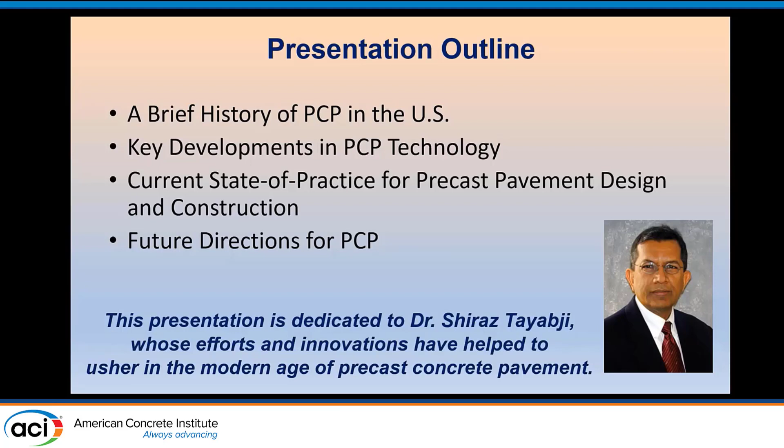Starting out at the ground floor, for those that may not be familiar with the technology, the real motivation for precast pavement technology is the fact that we have a lot of very busy, very congested facilities. On the highway side, very high levels of traffic day and night make it very difficult to find times to work on these pavements. There need to be alternatives for repairing and addressing distresses in these pavements that don't take much time but are still durable. And the same thing is true on airfield pavements as well.

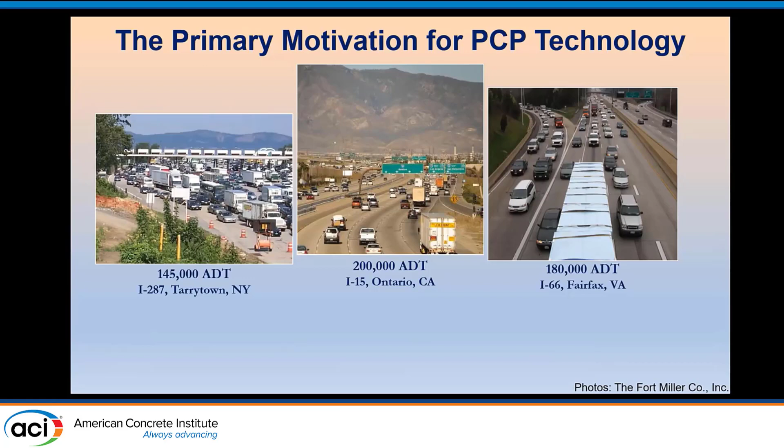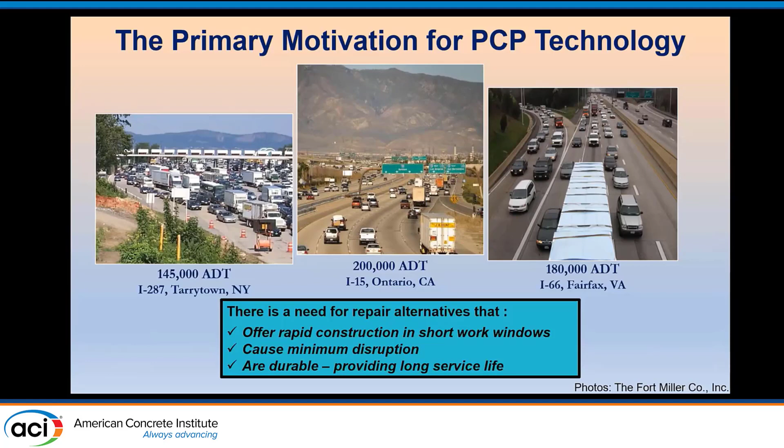I didn't show a crowded airfield runway or taxiway here, but clearly those are also facilities we can't really afford to shut down for very long because they are mission critical. So there's usually a need for repair alternatives that allow you to make the repair in a very short work window with minimal disruption to traffic, and yet are durable, providing long potential for service life, 40 years or more. There are different technologies available, but precast concrete pavements are one of them, and one that's been developed relatively recently.

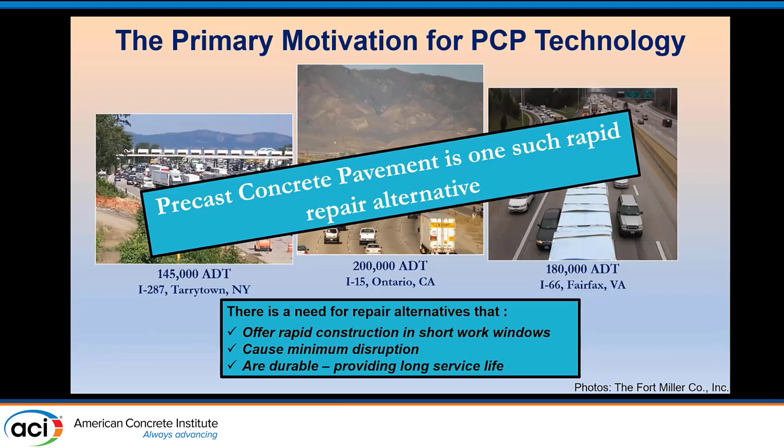If we look at a brief history of precast pavements in the United States, it actually goes back about 50 years. There was some experimental use of joint repairs, both partial depth repairs and full depth repairs of panels in Michigan and Virginia. There's actually a fair amount of work done at airfields, military bases primarily, demonstration projects and trial projects in the 70s and 80s, and you see some of those listed here.

But it didn't really take off, so to speak. The technology really was not adopted. We didn't see hardly any of it into the 80s and 90s.

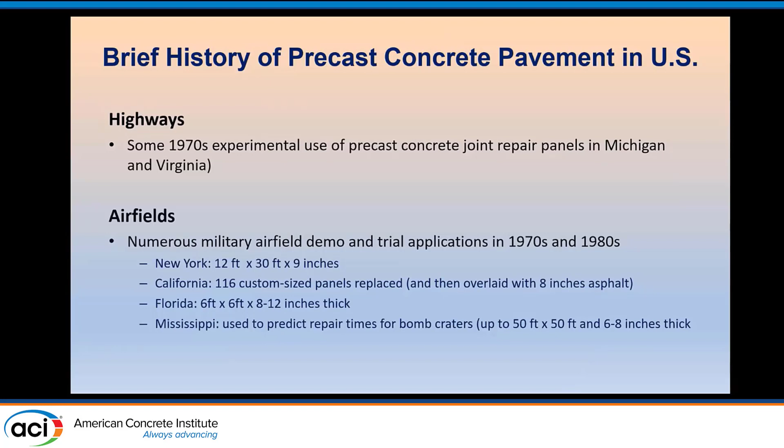But in the early 2000s, there were 4 projects that I would consider kind of kicked things off, and they all kind of happened at about the same time. One of them was the I-35 Frontage Road project down in Georgetown, Texas, a demonstration project put together by Frank McCullough at the University of Texas, a professor there, and a number of his grad students. It was a demonstration reconstruction project that took place over a couple of years.

It covered 2,300 centerline feet of 8-inch roadway, 2 lanes wide with shoulders, so a total of about 36 feet wide. Post-tensioned in 2 directions, in both directions, which resulted in some fairly long effective panel lengths. The actual panel sizes, as you can see in the photographs, were probably around 8 to 10 feet longitudinally, and either half the width, about 18 feet wide or 36 feet wide. They did some full width placements and some half width placements.

You can see some of the photos here, and it was a real important project. It was the first major precast post-tension project, demonstrated a lot of specific construction techniques, the use of the tongue and groove system to help align things, the use of plastic sheeting to reduce friction, to allow you to post-tension effectively and draw the slabs tight together, and demonstrated the performance effectiveness of the technique over time. So it was a good project, and it helped spur things on further.

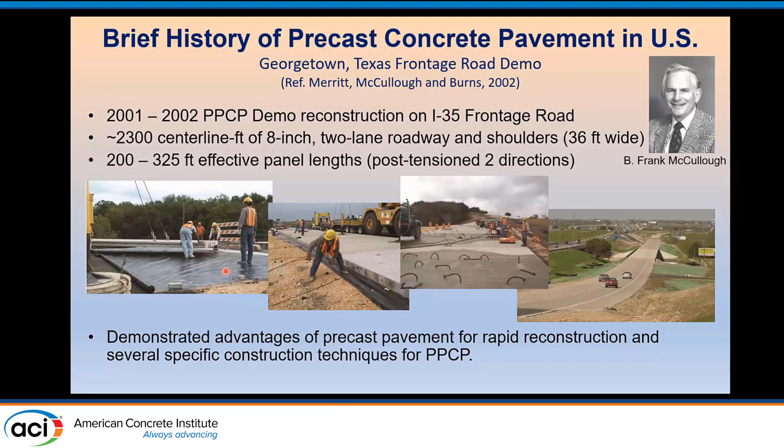Another project happened around almost exactly the same time, referred to in Shiraz's presentation this morning, the Tappan Zee Bridge Toll Plaza, just north of the New York City metro area. This was the first major construction project done under live traffic, about twice the square footage of the Georgetown project, but over 1,000 jointed concrete panels, doweled and tied together, placed about 8 to 10 per night, overnight, when traffic was greatly reduced.

And they were all placed very precisely using a system developed by Mr. Peter Smith at the Fort Miller Company, who was assisted by Ernie Barenberg, Professor Barenberg from the University of Illinois, on some of the conceptual development at the time. You can see they used a bottom slot system for the dowel bars, which gave a fairly clean surface.

It had grout distribution channels for injecting grout under the panels and spreading it to provide uniform support. But the main part of the support was actually provided by this very finely graded bedding material, placed on a pretty accurately constructed base material as well. This allowed the slabs to be placed and pretty uniformly supported even before the grout was injected under the pavement.

And this allowed you to really expand the work windows. For example, if you have an 8-hour work window and you've got to, within that time, do your saw cutting, demolition, removal, placement of the panels, and then place grout and allow it to cure and gain strength, you've effectively shortened your work window.

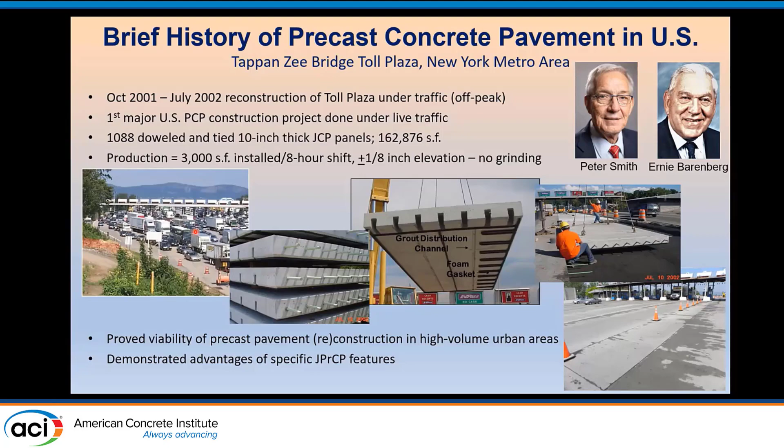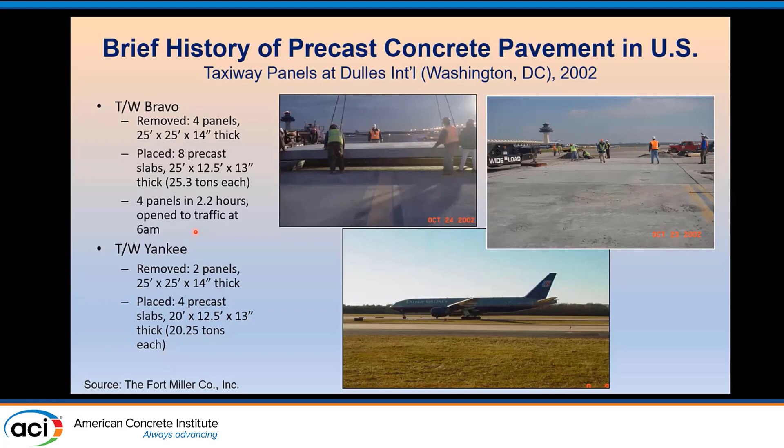There were also at the same time a couple of projects done at airfields. One was done again with the Fort Miller system at Dulles International Airport in 2002. A handful of panels on two different taxiways were removed and replaced, open to traffic after just a few hours of construction time. And then there was another one in New York at LaGuardia Airport, very similar.

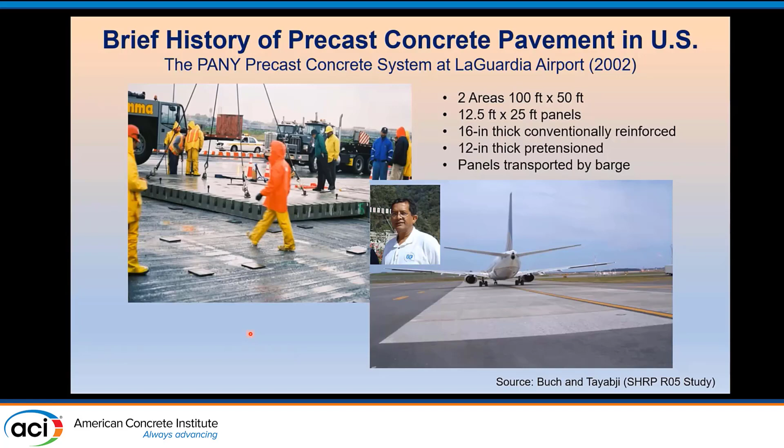But again, these were the only two major projects for precast on airfield pavements in the United States for quite a long time. Those four projects together, the two airport projects and the two pavement projects, did spur a lot of interest. People saw the potential. We certainly had the need with our urban areas and high traffic areas to expand the use of this technology. And that led to the formation of a technology implementation group, the AASHTO TIG, or LST, the lead states team on precast concrete paving slabs.

This group, building on the enthusiasm from those first four projects, was active for about 3 or 4 years, starting in 2005. Representatives from a number of state highway agencies and some toll authorities, New York State Thruway Authority and Port Authority of New York and New Jersey, as well as folks from Federal Highway Administration, academe. Dr. Berenberg was on the panel, and Dr. Buch, I believe, was on the panel from Michigan State University, and some folks from industry.

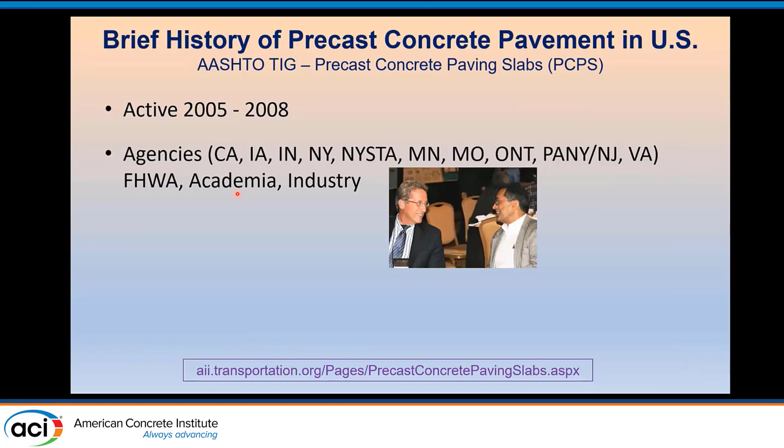All the major purveyors of precast pavement, if you like alliteration, were on the panel as well, and that included the guys on this call here today. Myself and Shiraz were both a part of that group as well.

And the products that this group produced were very useful in spurring the additional implementation of precast pavements around the country. Probably most useful were, almost in reverse order from how I've got them listed here.

Specification Clearinghouse: all the specifications from the agencies that had done work were placed online in a place where they were readily accessible for people thinking about doing precast paving, to reference those specifications and build off of them. The panel also developed their own set of guide specs based on what we thought were the best practices from the existing state specifications.

There were 3 separate specifications: one for the design of the systems, one for constructing and fabricating the systems, and one for approving systems. There was also a frequently asked question list for people just getting started in the area. All this stuff is still available online. It's been a number of years, but I provided the link at the bottom of the page here where you can still find all of this information and material.

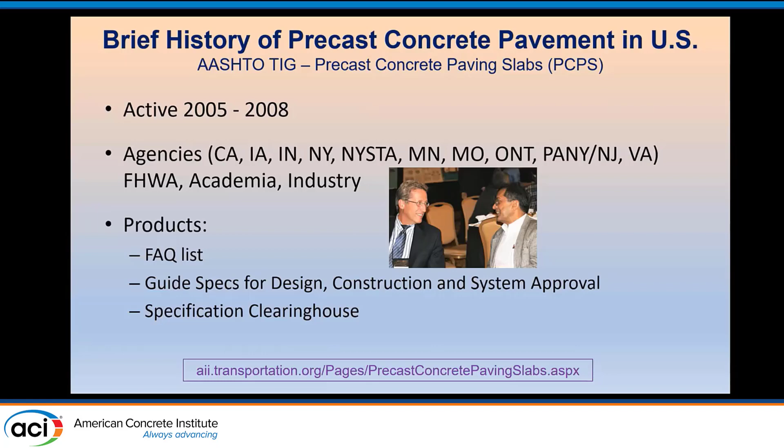An update in 2018 was published by the National Precast Concrete Association. As of 2018, there were more than 113.5 lane miles, and that's just the jointed type of precast pavement, not counting pre-stressed post-tensioned. So from 2013 to 2018, this continued on a very steep trend, about 4 times as much precast built, a 4-fold increase over 5 years. A pretty phenomenal rate of adoption.

Again, Shiraz was instrumental in that adoption. He was working with the Federal Highway Administration throughout this time to help states with their implementation through FHWA's programs.

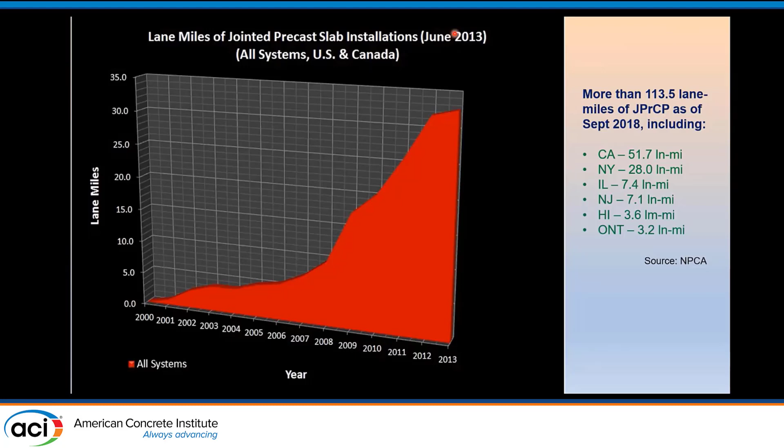There's not a lot of time here to talk about precast in general. I'm going to talk about what I think were some of the key developments along the way that helped spur the adoption of precast pavement technology. In my mind, probably 3 of the most important things were the advances in slab support and slab leveling, advances in achieving desired surface geometry, and in load transfer system design.

There's another bunch of things that would get honorable mention on this list, but today they're kind of unmentionable. I would talk about pre-stressing for using longer panels or reduced slab thicknesses, and some of the things that Shiraz talked about earlier for repairs of CRCP pavement that he worked on with the Illinois Tollway Authority. Peter Smith has a different design he had worked on developing as well, I think was being implemented in Texas. But we won't talk about those any further.

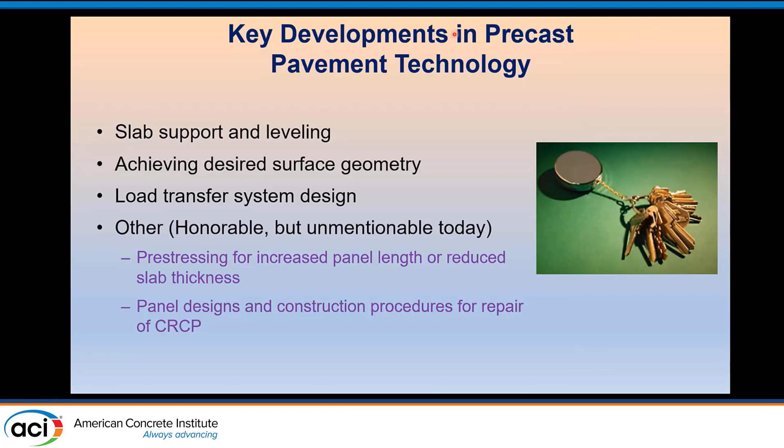Let's look at the first 3 only. Historically, there have been a few different methods of achieving slab support. I've already mentioned the grade supported approach that the Fort Miller system uses, where you very accurately prepare the foundation, finely grade a bedding material to place on top of it. You can put the panel directly on that, and it's reasonably well supported and can be left open to traffic for a night or a weekend. But eventually you come back in and inject grout to fill up the minor irregularities in support that would exist.

Another approach early on was to use urethane or cement grout injection. In this case, the panels would be cast a little less thick than the surrounding slabs, and they'd be set into place. Then they'd be raised to the desired elevation by a process very similar to slab jacking that we use for concrete pavement rehabilitation.

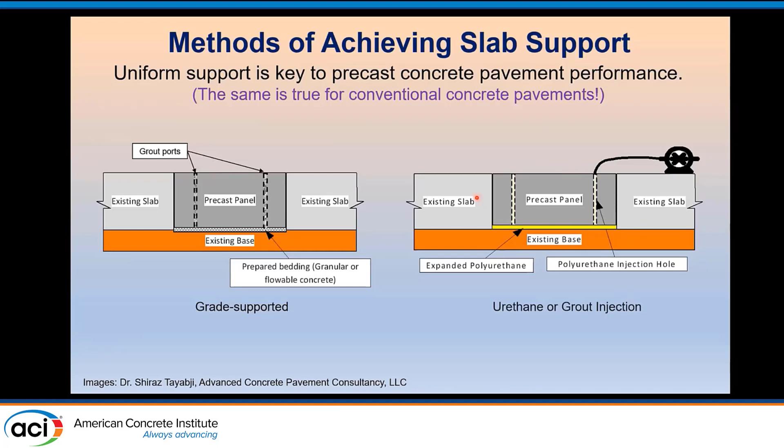One of the disadvantages of the grade supported systems is that, yes, it does expand your work window a little bit, your productivity window, but it takes a lot of work to do that. You have to place the bedding material, grade it, wet it and compact it, re-roll it, maybe add a little more and make a final grading pass, because success really depends on getting that graded within just a few millimeters of where you want it to be. That includes not only flat slabs, but slabs transitioning into or out of super elevation, so you could have non-planar surfaces you're trying to grade. That's a time-consuming operation, potentially.

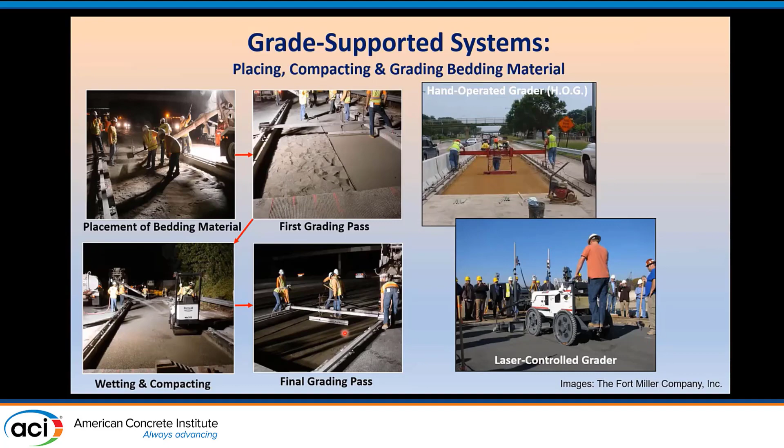I think one of the things that has really helped increase productivity in installation has been the development, or redevelopment really, of the use of slab jacks. I say redevelopment because if you look at this first picture from LaGuardia Airport back in 2002, they had some slab jacks built into that panel as well. But it wasn't really in a production mode until the folks at Gracie Lift developed their system, and there are other systems competing with that now as well. What they have now is an embedded jacking system, with a screw going through a threaded sleeve embedded in the concrete, pushing against a base plate, and that screw will lift the pavement into place.

But before you even do that, it doubles as a slab lifting system, so it's part of the slab transportation system as well. You've got these embedded jacks, you lift the thing into place, and then you fill the area underneath with grout or urethane to complete the system.

And that's what we're seeing here. They're using a drill to adjust the elevation of the panel using the screw head there, and now it's been removed, and they're simply filling the void underneath the pavement with a cement grout in this case.

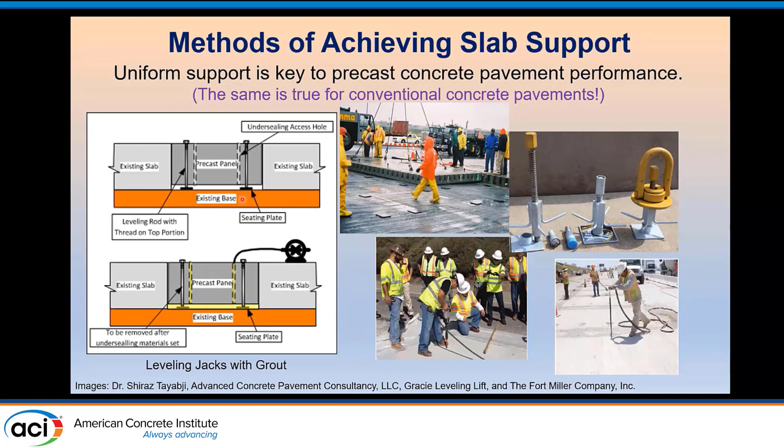Speaking of improving the surface and the way the joints match, it's very important to match the pavement surface geometry. Anything you put back into the pavement eventually has to match the shape of the surrounding pavement surface. The earliest slabs were all single plane slabs - all four corners, A, B, C, and D, would all reside in the same plane. Perfectly flat slabs, where slopes of opposite sides are equal.

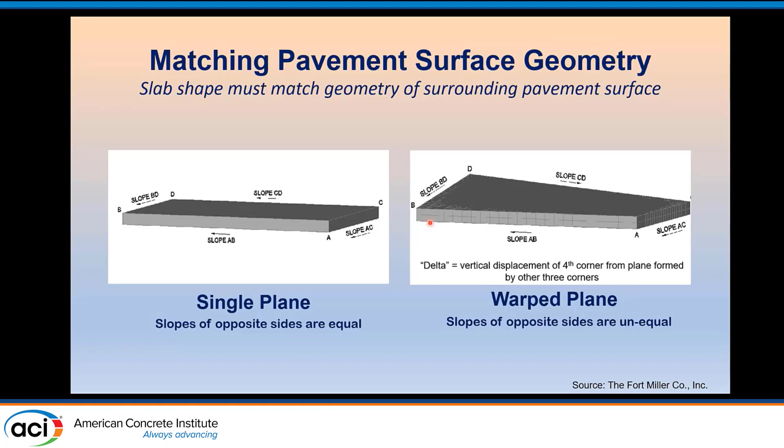In reality, what we have very often is situations where the slopes of the sides should not be equal. We need to produce slabs that are warped, deformed, twisted, or non-planar - there's a lot of different words for the same thing. But any 3 points determine a plane, so we can determine the degree of non-planarity or warping by measuring the distance that the fourth corner is out of plane from the plane established by the first three. We often refer to that as a delta, the vertical displacement of that fourth corner.

We need this more often than you might think. You might think it's a fairly uncommon thing. Obviously you need it in places like this if you're doing a curved, super elevated approach ramp, for example. This had deltas as much as 2 inches on these panels here.

But even on what looks like basically straight line tangent sections of roadway, you've had a pavement that's been in place for 20 or 30 years. There's been some settlement, the pavement suffers from creep perhaps, or maybe just very small irregularities in the way the pavement was paved can create irregularities in the pavement surface. In this particular photo, there were deltas of as much as 1.5 inches on straight ahead roadway. So we don't often see them, and you really need to perform a 3-dimensional survey, pick up all your corner points before you fabricate your panels so you know exactly what you need to fabricate, and whether or not you need a warped panel or can get by with a flat slab.

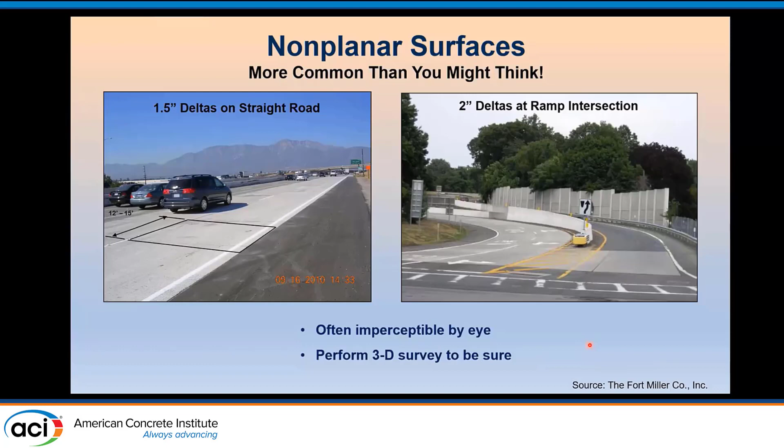In the events where we do need non-planar surfaces, there are a couple of different options. One is to take a flat slab and simply grind it to the profile that we want. We have wonderful diamond grinding machines that many of the IGGA would promote, and that many grinding contractors will tell you can do the job, and they will do the job. The advantage is that it's relatively cheap and easy to make a lot of slabs that are all flat and uniform in size and dimension. That's pretty easily done and less costly.

You don't have to make individual slabs one at a time. But the negative side is that if you don't have good matching at your joints, you're going to have more grinding to do. You may have to remove an inch, inch and a half, or 2 inches of concrete to provide a smooth ride. And if you're going to remove that, that means you're probably going to increase the thickness of the slab and make that a sacrificial amount that you're grinding, because if the design thickness is 9 and you're going to grind off 1 inch, you don't have your design thickness anymore.

So you have to add that additional thickness up front and grind it off. And the other thing is, of course, if you take a flat planar panel, as we see in the lower right-hand corner here, and you put it on a non-planar support surface, you're going to have to use extra grout to fill that up.

And the bedding grout is fairly expensive for that rapid early strength material. So these are reasons in favor of and against using the flat slab and grinding process.

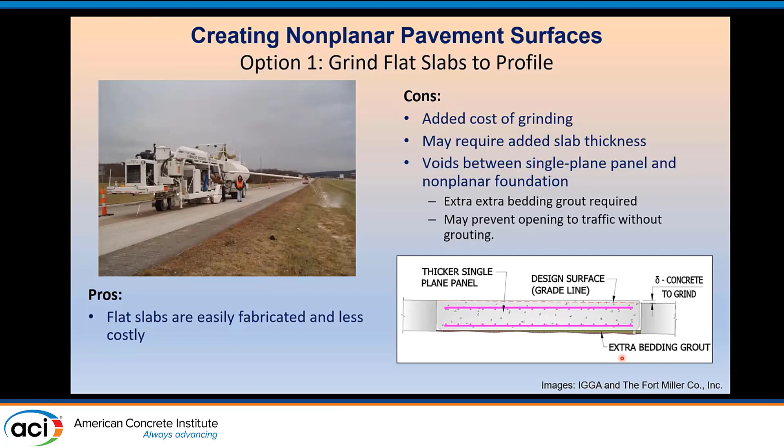The other option is to fabricate non-planar panels. On the plus side, we don't need to spend as much time grinding, so there's less cost for grinding. We don't need to fabricate the panels with additional thickness for sacrifice, and we'll probably need less bedding grout. We'll be able to open the slabs to traffic without grout if we've also matched the support system pretty well.

On the negative side, though, it takes a lot more data. You're designing individual slabs and fabricating individual slabs with very special formwork and a special casting table that is going to produce that warped surface. And as far as I know, it's a proprietary system there. It was — I'm not sure when the patent runs out. It may be running out sometime soon, but it's been around for a little while, and at least it has been a patented process.

And the other thing, of course, is that if you are doing any sort of pre-stressing, the further you are out of a flat plane, the more that can induce eccentricities to the forces due to pre-stressing. That may be something that needs to be looked at.

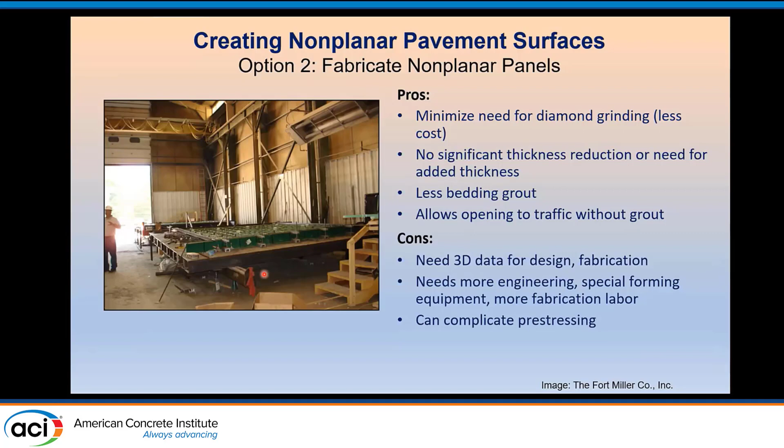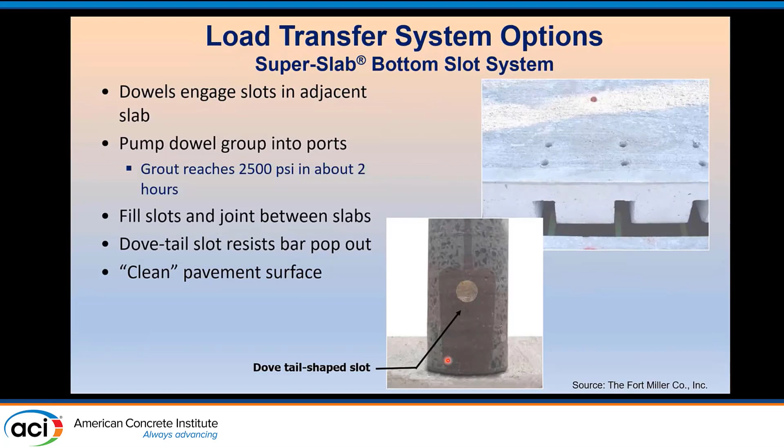The third thing that has been very valuable is the load transfer system options. We mentioned the Super-Slab system had the bottom slots, which gives you a nice clean surface on top. The slot itself is a dovetail on the bottom, which kind of locks the grout into place — a very efficient system that way.

Early on, systems included basically a dowel bar retrofit system. The slabs are cast without having any dowel bars in them whatsoever. You'd come along with ganged saw blades, cut slots in the surface, remove the material from between the slots, and retrofit dowel bars and fill it back in.

A problem with some of the top slot systems, just as with dowel bar retrofits, is that the quality of the backfill material becomes a performance issue in some cases. It's a potential concern, and you've got basically surface repairs that are often right in your wheel path, which is a very rigorous environment to place a repair.

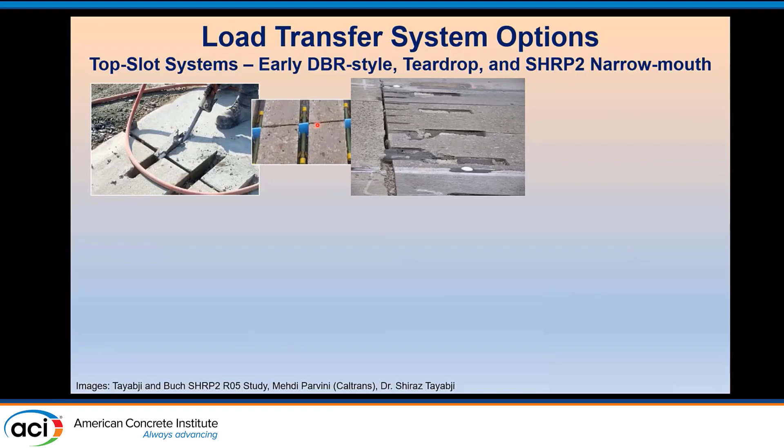To address these, different types of top slot systems were developed. Again, the top slots were largely a reaction, I think, of a lot of folks to the proprietary nature of the bottom slots that Fort Miller had at the time. So there was a way to try to reduce the cost by not having to pay royalty fees, and to avoid the use of proprietary products in some states.

So we had the teardrop shaped top slot, which had a narrower top slot, reducing the exposure at the surface. And then we have the narrow-mouth top slots that were developed under the SHRP2 project, and Shiraz was instrumental in the development of these.

In these particular cases, the dowels are installed in those slots before the panel is dropped into the pavement, and there is a receiving hole on the other side, or drilled in. Once the pavement has been placed and the panel has been placed, an operator reaches down in there with his hand or with a tool into that widened slot and pushes the bar into place, then fills the slot back in. And I think if you look real carefully, you can see Shiraz here.

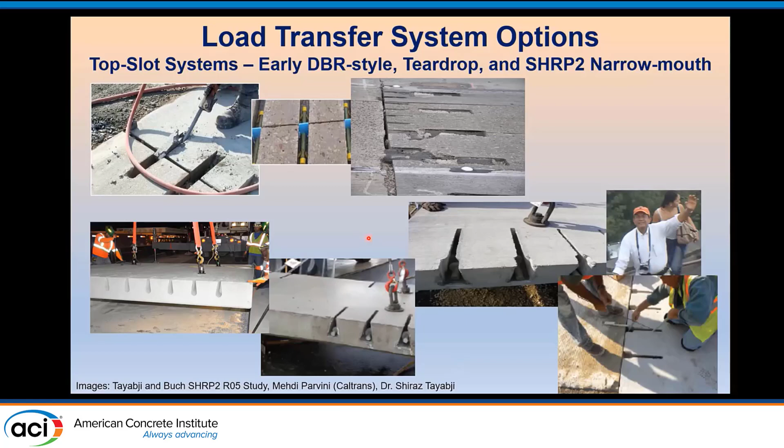Oh, there he is. And just so you know, that picture was taken — I took that picture of Shiraz on the Great Wall of China. And contrary to popular opinion, he was not involved in the design and construction of that wall. He's been involved in a lot of construction-related things around the world, but that was not one of them.

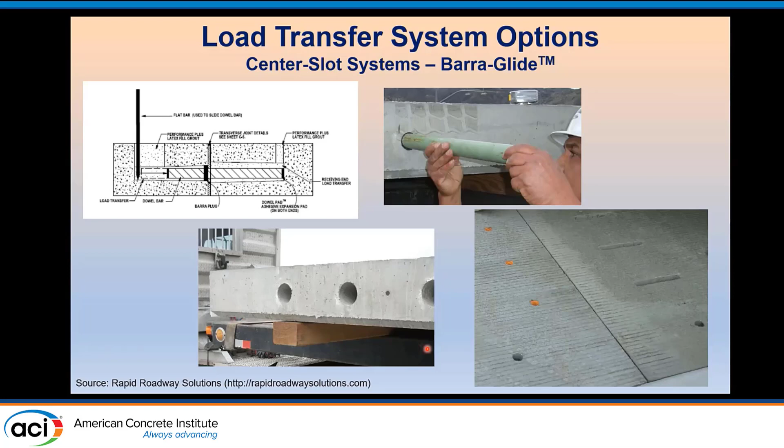So those, I think, are the three things that have been probably the most beneficial along the way to help accelerate the precast pavement industry.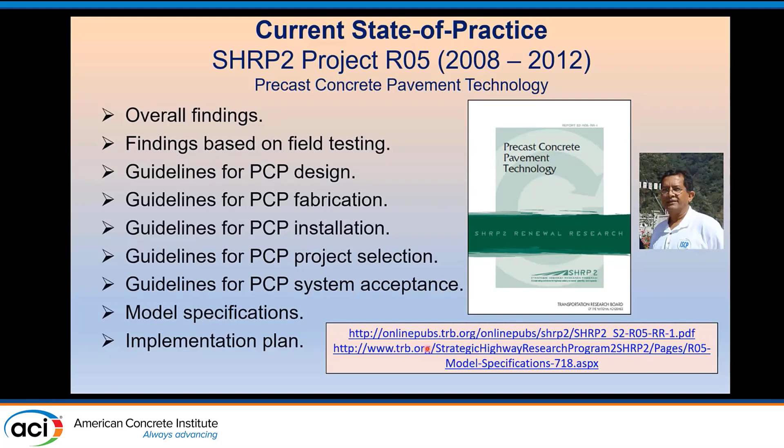The current state of the practice, I'd sum it up by saying there have been a couple of really good publications put out in the last 10 or 15 years that summarize best practices for design, fabrication, and installation of precast pavement systems. One is the SHRP2 R05 report. Shiraz was involved as the principal investigator on this project. It's fairly well focused on precast, post-tensioned, pre-stressed pavements. It does have some information on jointed systems, which I've spent most of my time showing here, but it's an excellent reference for general principles of precast concrete pavement technology, and the source is linked at the bottom.

The second one would be the National Precast Concrete Association's Manual for Jointed Precast Concrete Pavement. The most recent edition came out in 2018. This was written primarily by Mr. Peter Smith from the Fort Miller Company, formerly with Fort Miller Company. He's retired now, and I assisted on a couple of chapters in this as well. It's the same kind of thing but with greater focus and emphasis on jointed systems. The link for that is down here at the bottom as well.

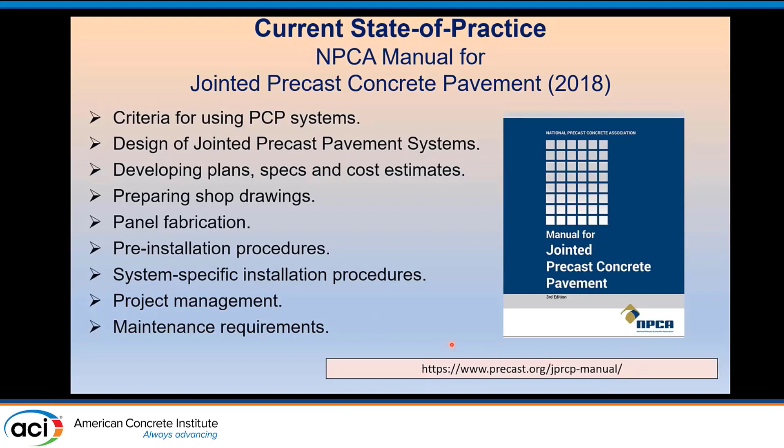Looking ahead to the future, I think one place we'll see more use is reusable urban pavement systems. This is one system that Fort Miller has, made possible by the use of hollow dowel bars. The main purpose with reusable systems is to allow easy access to underground utilities without tearing up the roadway. You can take the panel out, do your work underneath the pavement, and put the panel back in place. There have been a few major installations of this over the last few years—New York City, and Richmond, Indiana did a few miles here a couple of years ago.

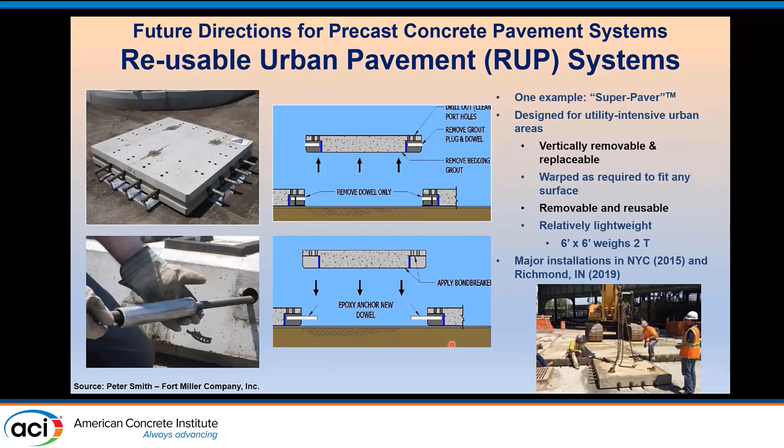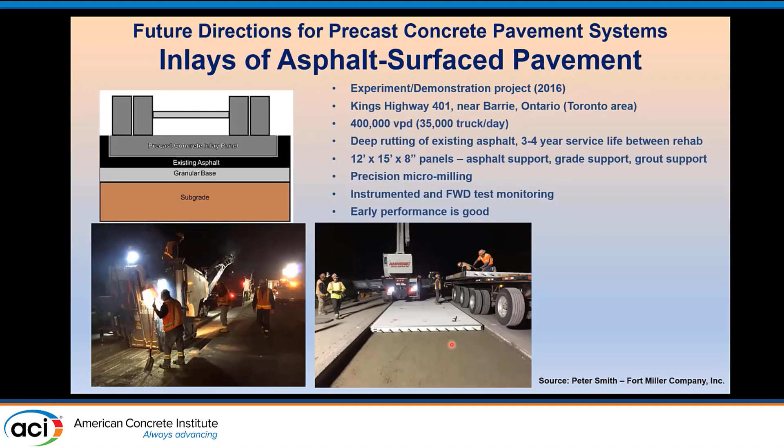Another thing for the future is the use of rapid replaced inlays of asphalt surface pavement. This is up in Ontario—a demonstration project done about 4.5 years ago on the 401 near Toronto. They had very deep rutting in the asphalt pavement and were having to mill and fill every 3 or 4 years. Precast pavement was used as a way to overnight micro-mill, install, grout, and open to traffic the next morning, giving concrete pavement that would not rut and would perform well.

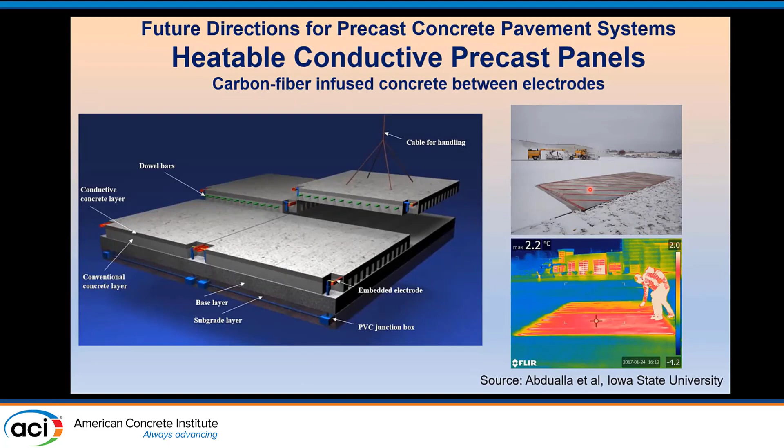As we get into more modern applications, there's work being done at Iowa State University using conductive concrete layers to produce heated concrete and eliminate problems with snow removal. You can see an infrared image here and the actual photograph. This is up in Iowa, and like Peter Taylor said, there's lots of snow up there except where they've got these conductive concrete panels in place. So that's another look forward.

I think one thing of very great importance is the possibility of using roadways to provide power to recharge vehicles on the fly. Every electric vehicle we're creating and using more of has a limited range. If you can embed inductive loops into concrete pavement, as has been done in Korea and Singapore—these pictures here are from Singapore, where they've got a few places for their buses—you can recharge on ramps and parking areas and extend the range and usefulness of these electric vehicles.

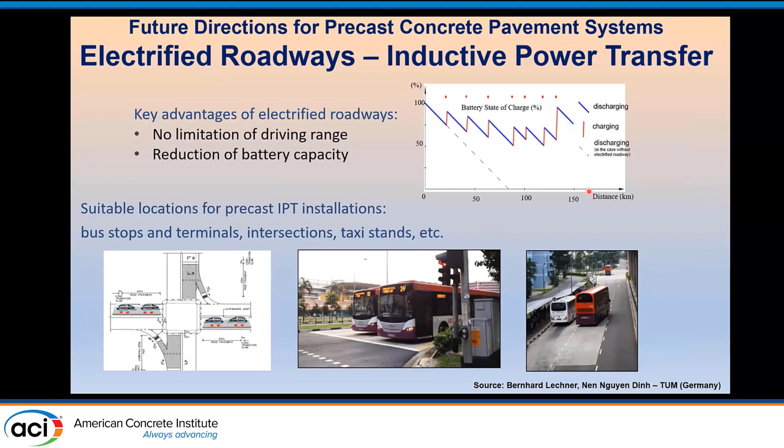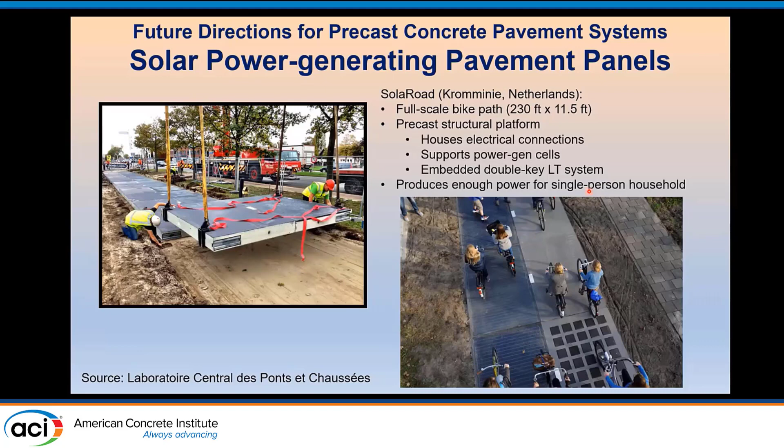Finally, can't talk about pavement without recognizing it's a very large surface that reflects the sun. Why not absorb that sun and turn it back into power? There have been experimental projects, like built bike paths in the Netherlands with embedded solar panels, that generate enough power for relatively modest households. If we upscale that technology, there may be a future for using our roadways not only as a linear landfill for waste products, but also as power generating stations.

That brings me to the end. I'd like to close by saying that Shiraz has seen this through from the beginning with the precast panels, and he continues to be active and will remain active in the future. He's been a tremendous friend and colleague over the years, and I'd like to thank him again for all of his contributions and wish him the best in this next phase. So I'll wrap things up. Thank you.